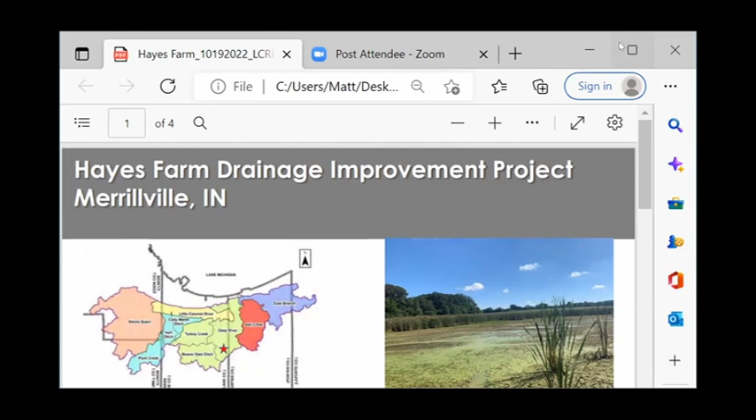So what we have here is the two low areas within the ag field, and to the east of the ag field you have a grass field subdivision, and to the south you have Auburn Hills. Randolph Street runs north and south, and to the north is 93rd Avenue.

Those two low areas impact each subdivision. We believe there's a lot of old farm tile, old clay tile that has failed over the years. So in working with the farmer, we thought we could have a win-win situation where we solve the drainage issue or ponding issue with the subdivisions as well as Randolph Street, and the farmer also gets some additional yield to plant additional acreage of crops without loss.

We've been working with Farmer Hayes, and he granted us an easement, which we have recorded. With that, I'm going to let Darren take it from there and explain our strategy for draining this area off into the unnamed tributary of Deep River.

Thanks, Matt, and thanks everyone for having us tonight. So the map you're seeing here shows the farm itself. It's backwards L-shaped, and over time, from 1978, you can see it was draining just fine. Even after development in 2005, there's still a lot of crops on the field. Now you see maybe one minor wet spot.

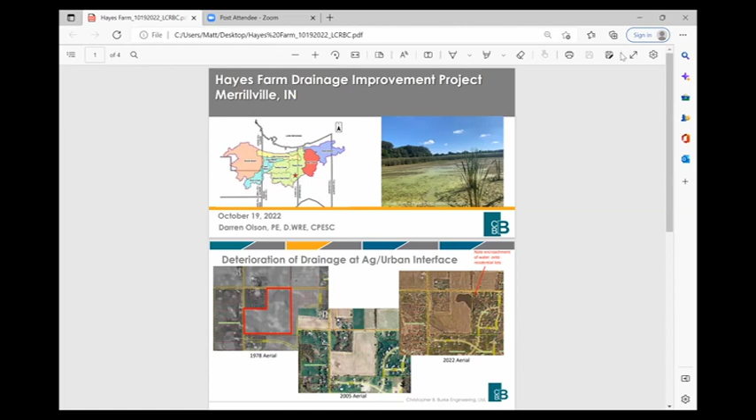But by the time we get to 2022, on the right hand side, something has really gone awry out there. In 2022, you could even see up in the upper right hand corner that the standing water is now encroaching on the subdivision to the east.

As Matt indicated, the goal of this project is to restore drainage on this property. That's going to improve drainage not only for the Hayes Farm, but for the subdivision to the east, and also the subdivision to the south, because as water gets high enough in that western low spot, it also begins to impact drainage in that southern subdivision.

When they get high enough, they eventually overflow through the farm field, end up at the depression near Randolph Street, and then make their way onto the floodplain area west of Randolph through a culvert under Randolph Street. But right now the drainage is so deficient that we get standing water for prolonged periods, impacting the adjacent residents.

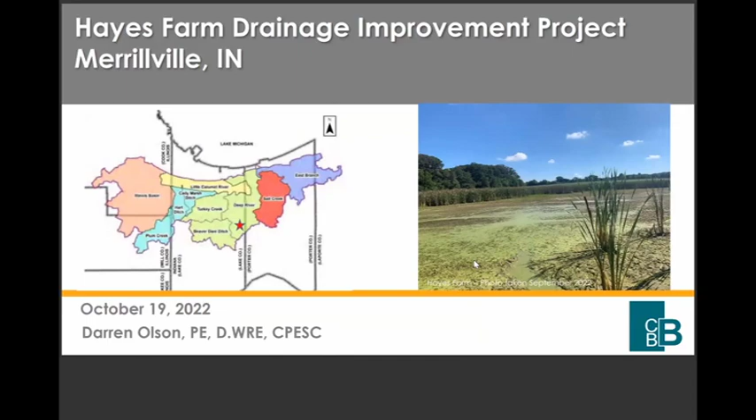Just so you're aware, while Darren's bringing this up, I did contact NRCS to see if there are any cost share programs through the Farm Bill to assist with this. We met on site, and their conclusion was that with current Farm Bill programs, there was nothing to assist. I've worked with NRCS in the past, designing grass waterways and other agricultural practices with them, so I was surprised they didn't have something to help given the circumstances. That's why we're here today.

Hopefully everyone can see my screen. This is the last slide of our presentation. It's a very simplistic drainage system we're proposing to install. It will be small diameter, so we'll maintain the depressional storage on site, but it will allow this area to drain down much more efficiently after storm events.

Another component of the project is we're going to be using ADS recycled pipe. It's 60% recycled content, high density polyethylene. I did apply for a grant to IDEM, and I'm meeting with them in the final round next week. My application was for 24,000 linear feet of 12-inch high density polyethylene recycled pipe.

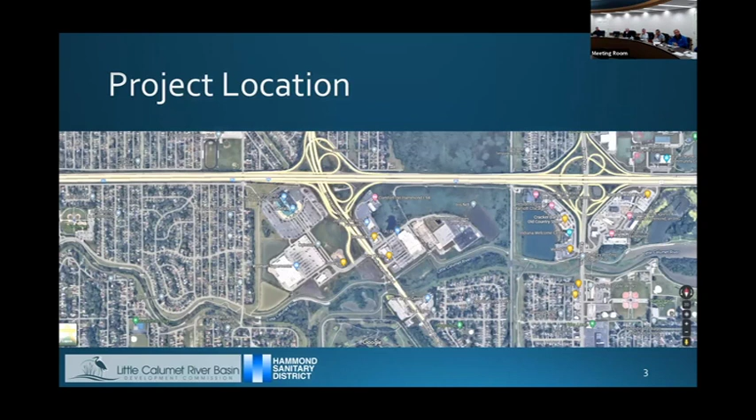Here's a close-up aerial view of the area this will be benefiting. The facility will be located approximately here in the center. It will collect combined sewer overflows from these 3 CSO pump stations, which currently discharge a combination of rainwater and raw sewage directly to the Little Calumet River during rainfall events.

This creates a number of issues, primarily negatively impacting water quality. Combined sewer overflows are a major impediment to the river reaching its full potential. A lot of solids are discharged annually, along with bacteria and material that consumes oxygen in the river, which can negatively impact wildlife and fish stocks.

Once this project is complete, it will eliminate about 288 acre-feet of CSO discharges per year, a total of about 16% of total annual CSO discharges.

Most importantly, it will eliminate, capture and send back to the treatment plant about 218 tons of solids currently discharged to the river every year. This amounts to about 86 dump trucks. This should greatly eliminate the dredging and cleaning of the river that currently has to take place due to all these solids. These 3 CSO outfalls are the primary source of pollution and solids into the river, so this will eliminate almost all of that.

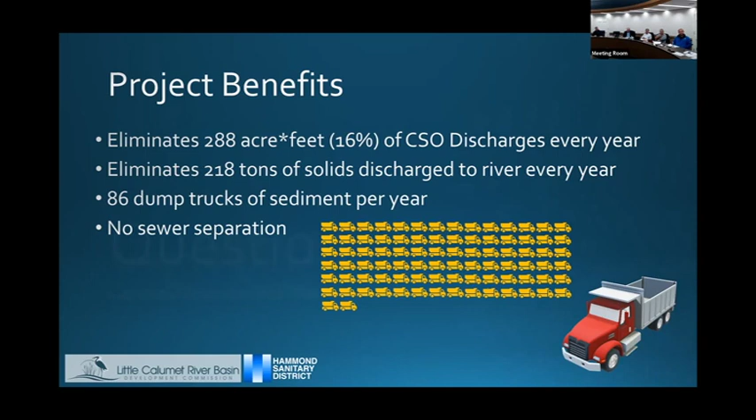That's basically it. There's a lot more technicality to it, but I wanted to keep it simple, and I'm happy to answer any questions you might have.

Question about the quantity breakdown of the sediment. So you'll be combining all 3 of those pump stations to feed one location? Correct. One pump station has a force main that currently goes through the site. We'll have to do some pumping and pipe work to convey the other 2 pump stations over to the site.

And do you have to go under the expressway for that north pump station? No, we do not, because the pipe already exists.

Is that empty area right now? Yeah, it's vacant. Grassland? It's vacant. Much of the parcel is designated a wetland - a very low quality wetland at that - and the portion where we will be building actually technically is not. It's a rather large parcel that's never really been developed. I think a long time ago there may have been something there. Was that one on fire a few years ago? Yeah.

It's just east of the Starbucks. Okay, all right, I know it. So the facility will go right here. The specific area where the facility will go is not a wetland, but most of this is a low quality wetland right now. It's never been developed.

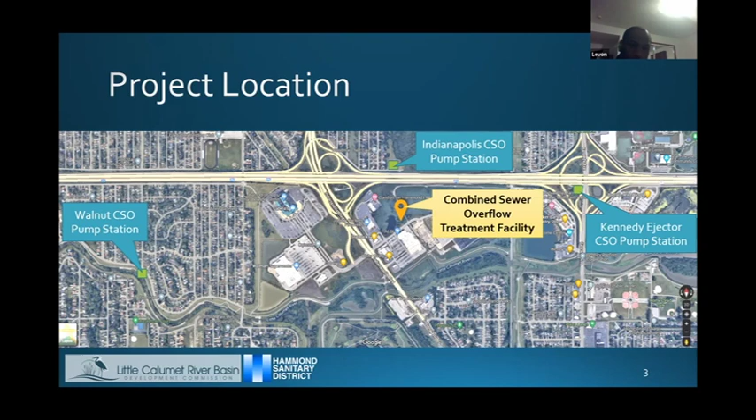Okay, back to your first slide, the 16%. This facility will capture 16% of annual average CSO volumes, and most of the pollutants currently discharged. The 16% of what total? Well, 16% of the total, I think there's approximately 500, or I forget the exact number. You have to do the math. The 288 is 16% of, I forget what the denominator is. So I have to do some math. But of the total annual CSO discharged in the river, it's 288 divided by 0.16. And this is in high rain events?

Okay, not system-wide. So we're going to spend $80 million to only eliminate 16%? Well, this is primarily a water quality project. It's to get pollutants out of the river, which are a huge impediment to redevelopment. We're only getting rid of 16%? What about the other 84%, you don't care? Well, no, the water is treated.

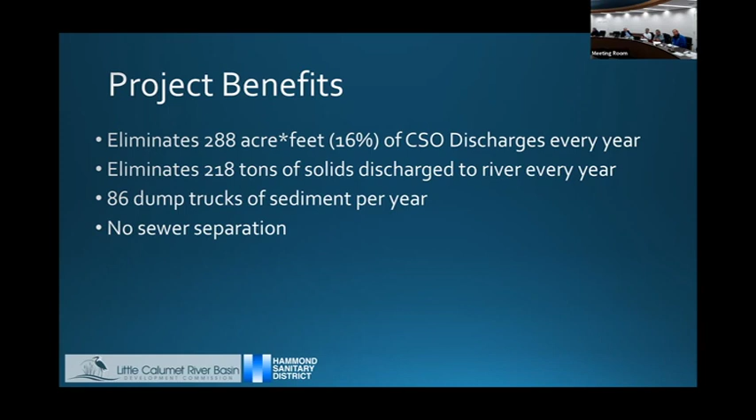So there's the dirty combined sewage coming in from the left. The solids are captured in this treatment facility, concentrated, and then sent back to the treatment plant for final removal and disposal. About 16% of the volume that currently goes to the river will be captured and sent back to the plant. The remaining 84% will go to the river, but it will be cleaned. Does that make sense? Yes, sure.

So when we get to how much of the pollutants are captured, it's much more than that. We will be capturing about 90% of total suspended solids and almost all of the bacteria that currently goes in there. I think that graphic probably represents a better picture of what's going on.

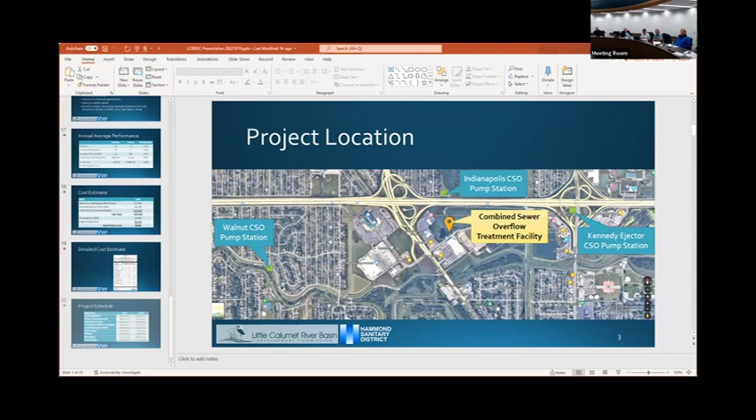So you get — go back to the other graphic, can you go back to that please? The other graphic you showed, no. Sorry, with the table, the one with the table. Oh, the table, I'm sorry. I think that tells a better picture of what's going on.

So are these real numbers, the number of existing events, or a future forecast based on... These are what we call typical year values, based on a model developed in the collection system.

Is there a place that you guys have, in reference, that you've actually done this type of project at, or that has been done in the area, that used this same filtration process to actually abate those CSO contaminants?

I'll jump in here for a second. My name is Marty Wielgos, I'm the CEO of the Hammond Sanitary District. I want to clarify a couple of things. First, this project not only affects water coming from the south of Hammond, but everything that south of Hammond collects, including Highland and Griffith. So we solve both Highland and Griffith's problem right now, including Hammond's. That's what this whole project is about.

To answer your question, the new technology we're talking about, the CMDF, has been used for several years. I call it new technology because both the state of Indiana and the US EPA have agreed that the way we want to apply this system at the Little Calumet River, as water comes in from the south, they believe it's going to work. We're the first using this technology in this manner. It's currently used inside wastewater treatment plants to do basically the same thing, but we're building it outside the plant, at the base of the Little Calumet River. That's the big difference.

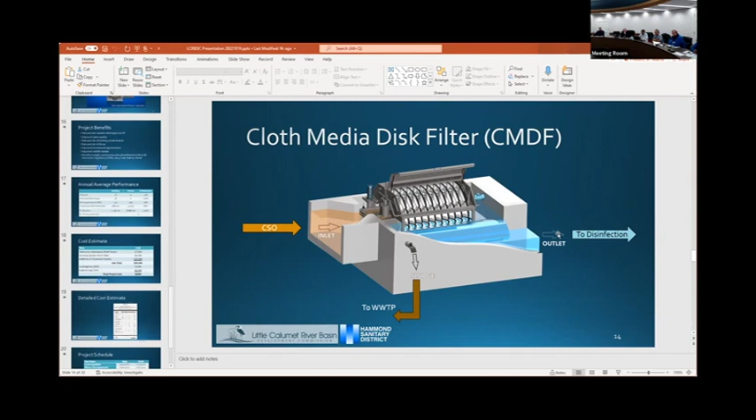Dave? Yes, Marty, first of all, I want to compliment you. It's a very impressive presentation that you're making, especially with the new technology. I'm all for new technology. But considering how important this river is to the people of Northwest Indiana, I wanted to know, did you consider a fail-safe plan in the event of power failure or equipment failure that may occur in your design? I'd like to know if you would take that into consideration before we go forward.

Well, actually, we have, because of the number of units we're going to have. So the possibility of half or more breaking down at once just isn't technically something to worry about on that scale. The filters themselves are always backwashed after an event. And then we'll have a maintenance person there every day to check on the facility.

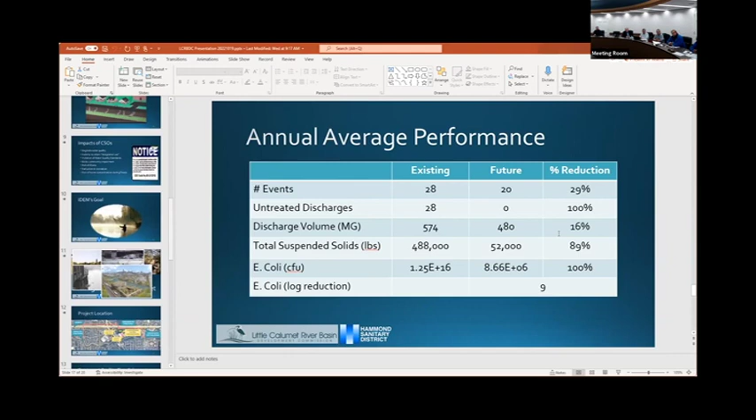The wastewater treatment plant's rated for 48 million, and we're handling all these communities. This will help us, because not 100% of what's coming across the line, including south Hammond, is coming to the wastewater treatment plant. So that's a big plus. And as I said, several years ago, we built that 30 million gallon basin - technically a big hole in the ground with a liner - that was $55 million. So we have some backup.

The good thing about this project is that it meets a lot of the criteria that the state of Indiana and the federal government have set out for us. I'm born and raised here in Hammond, Indiana, and I remember as a child going over the Grand Calumet Avenue Bridge, and all you would see is crossbones and skeletons - don't touch the water. You would see all the garbage. You couldn't even see - it was all murky and nasty.

I love giving tours at the plant because I like the residents to see what we do. You can only imagine what comes into the plant, which if we don't treat, goes into the Little Calumet. At the end of the line of treatment, which is all bacterial type treatment with live organisms, at the end of the day our fluid going out back into the river, back into Lake Michigan, it's so clean that wildlife has returned in abundance - not only to the river, but on the 28 acres we have on the east side of Columbia Avenue, the main part of the plant. Wildlife of every particular kind.

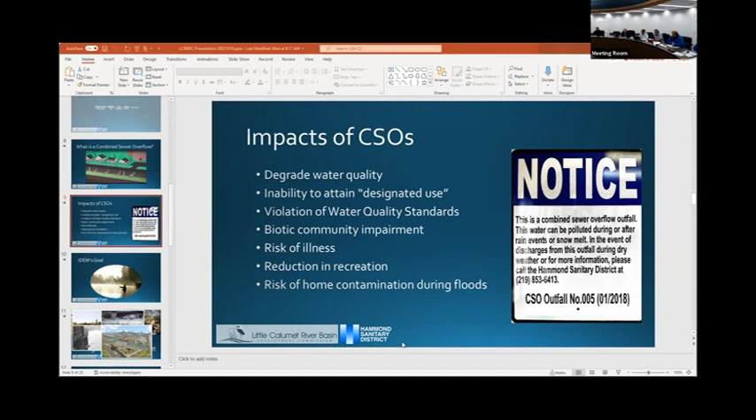New business. Mr. Vice Chair, I'd like to make a motion to open bids in the Griffith Levee Rehabilitation Interior Drainage Improvement Project. We have a motion. Second. We have a second. I'll be happy to open them if you want to go on to something else. Well, I don't know what I'm going to get myself into, so I'm going to get some reading here.

So while Dan's opening those bids, we're going to move to the next item on the agenda, which is statements from the floor. Anybody want to come up and help us out here? Go right ahead. Good evening.

My name is Doreen Carey. I live in the city of Gary. And I'm here to ask 3 questions tonight. What happened with the Maya lease agreement?

Did Maya Energy pay their lease agreement money that was in arrears as of, I believe, June or July of this year? Number 2 is Calabria, who made a presentation here about taking the development agreement that is currently the lease agreement for Maya. Has anything proceeded in terms of Calabria taking on that lease agreement? And number 3, when are you going to bring your group to Gary to talk about these issues with the people of Gary and the legislators and leaders of Gary?